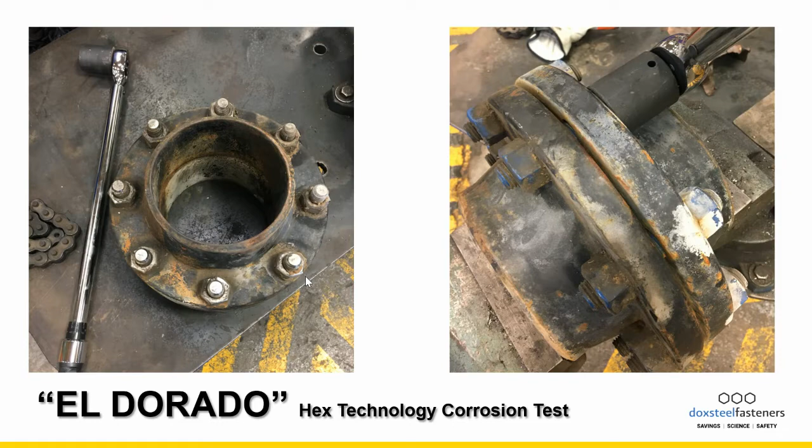So we stuck these flanges in there. We torqued them up with DoxSteel bolts, the ones on the left, and on the right we did PTFE studs. When we were using these, we were looking at breakout torque to see how it would affect things. With DoxSteel, we had a higher breakout torque than with the PTFE. And I said, if you're coating is so much better, how come it's so easy to break out with PTFE?

Didn't make sense. I was like, well maybe this whole lubricant thing, the PTFE acts as a lubricant, is better. And what they did is DoxSteel had a nickel cobalt electroplating on it, kind of like what you do with your car with paint - they do it with studs. So they had this really super technology, it seemed like, but a higher breakout torque.

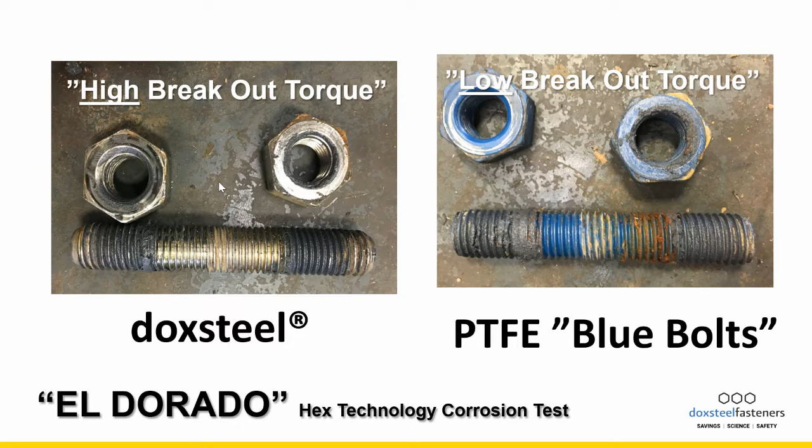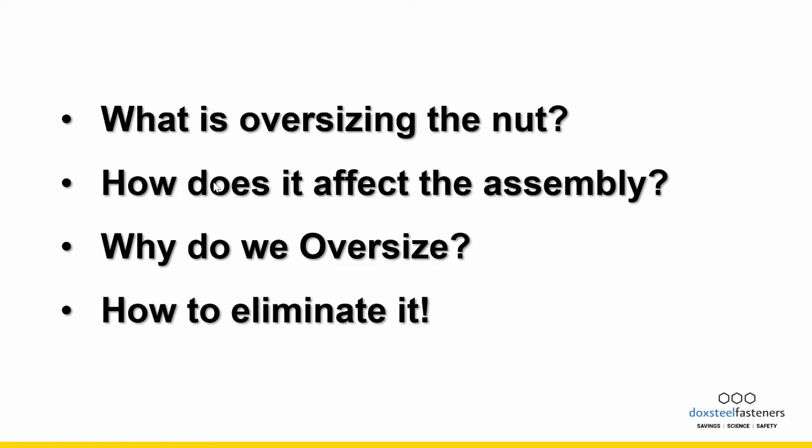And I asked Carlos to explain to me, why is that? And he said, man, first let's talk about oversizing, and then how do you eliminate it. I'm not going to get into that - that was further down in the presentation because it has to deal with studs and standards I'm not as familiar with. But I'll tell you the part I did get familiar with: what is oversizing the nut? Does that really happen?

Yes, it does. So these two pictures you're seeing are same magnification, DoxSteel versus the blue bolts. If you look, the DoxSteel has the electric plating on it over here - real tight fit all the way around. Pretty good. You look at this guy on the PTFE and you see how this guy is sheared right there - it doesn't come down and engage completely.

And this guy is sheared too. You've got this PTFE zinc lining that's kind of popping off over here and over here. So I didn't realize there was this much oversizing.

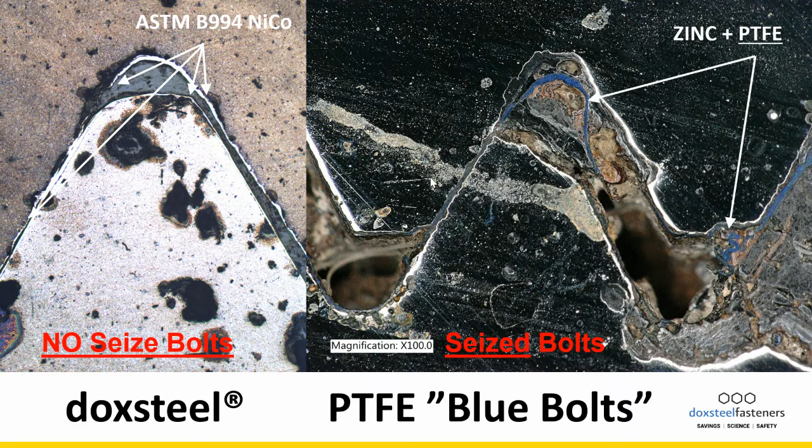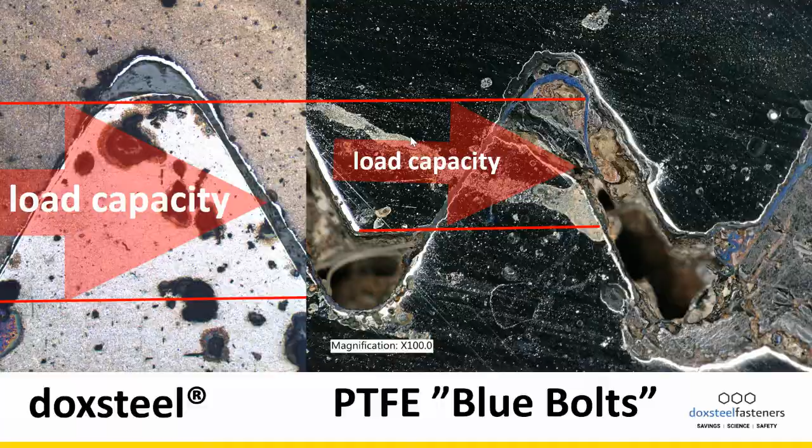And I said, okay, is there any way to take an x-ray of the stud? And they figured out a way to x-ray the studs. They said your load capacity for regular studs and nuts is going to be higher than on PTFE coated studs, and said here's what it looks like if you were to take an x-ray.

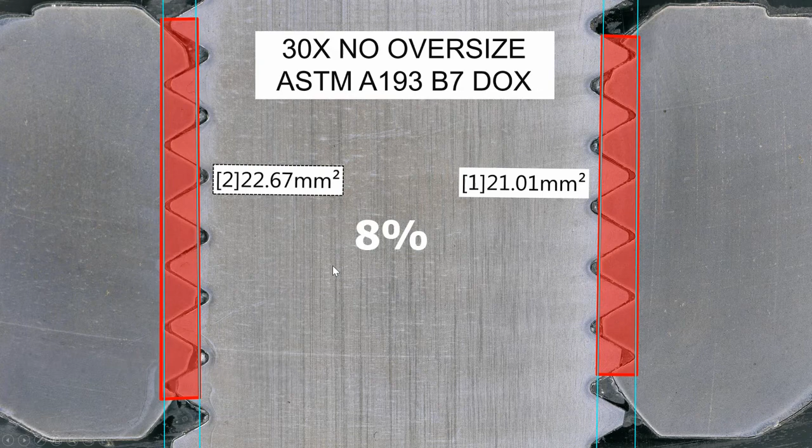These guys were torqued down to, I believe, like 250 foot-pounds, so it does have some load on them. And you can see this is just a regular stud, and there's good, pretty decent engagement all the way through. However - this one right here, sorry, this was their DoxSteel one - same thing, good engagement all the way through.

However, when you look at the oversize, look at that oversize. And they were saying this is 50% more than what the tolerance is. So you really don't have that much contact surface area on each one of these.

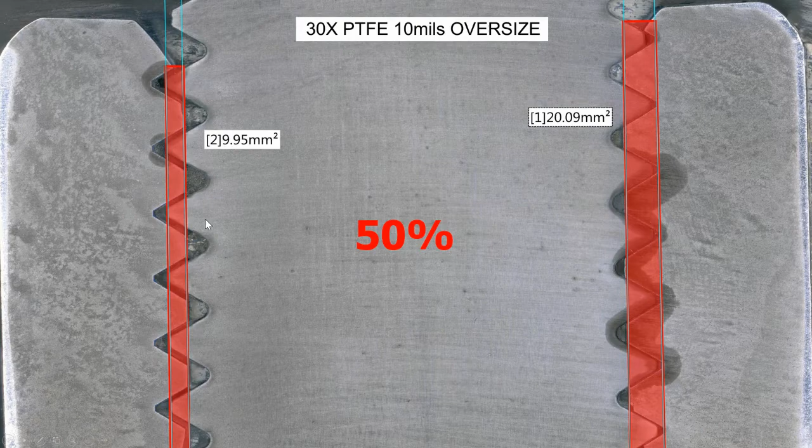Now what's really awkward on this one is if you look at the bar on the right, that's a little bit tighter than the one on the left. The one on the left looks really loose. And so I said, why do you see that? And so what they did is they put on these spacers.

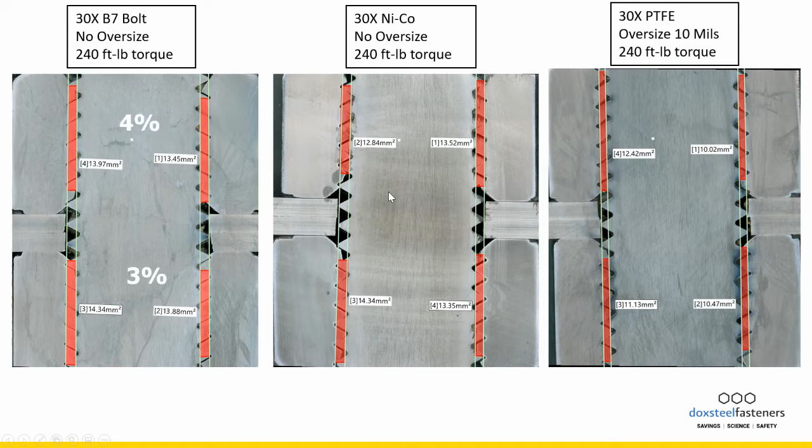They said, however, when you get to the oversizing - this is the nickel cobalt, no oversizing - but you can get this like 24% to 6% difference. So that's how much oversizing, how much material they took off in order to make it work.

And what we found is the oversizing of the nut directly affects the K factor. We've got another study on K factors on our website if you want to look at it, to see with 6 different manufacturers how a K factor for non-lubricated PTFE studs goes from like a 0.11 to a 0.28, which is holy cow, crazy for a K factor.

And part of the reason we believe is the fact that this over-tapping of the nut isn't as consistent as we would think - it's another variable that we're putting in. So oversizing the nuts is how they put the PTFE coating on, so it doesn't just scrape off.

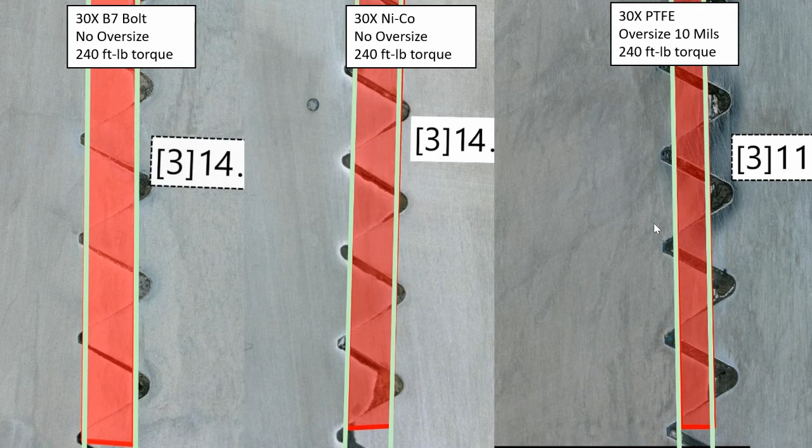So we thought this was pretty impressive, right? This is the total area of the stud. Total area of the stud goes down. And it was just amazing to us to see what this looked like.

Here's another one - no oversize. And then you start looking at the difference right here. It's just a lot less contact area in there. So we used to think it was because of the coating, but really we're finding that it's the over-tapping of the nut.

So we have to say thank you to Carlos and his team at DoxSteel. And his saying is, thinking inside the nut.